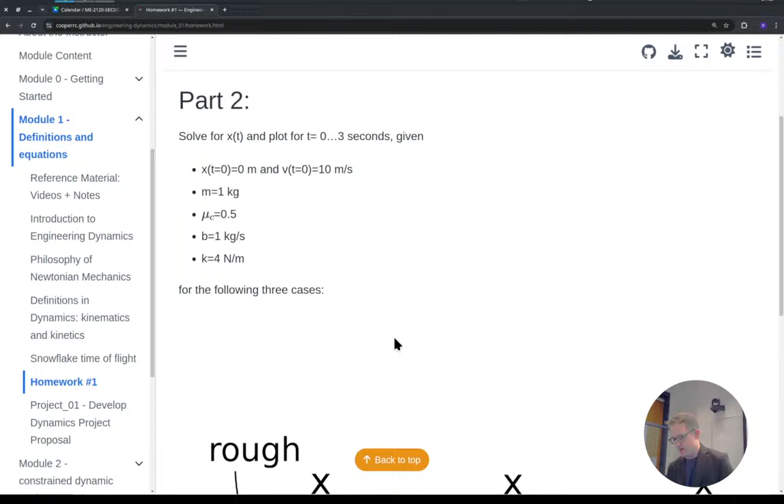Right now we're on to this last part of homework 1. Were there any lingering questions or things from the first few textbook problems that we were working on? Now that you've had some time to really go back home and talk to your roommates of like, hey, you know what we talked about today was the effect of mass on skiers and what their terminal velocities are. And your roommates are like, dude, leave it in school, get out of here.

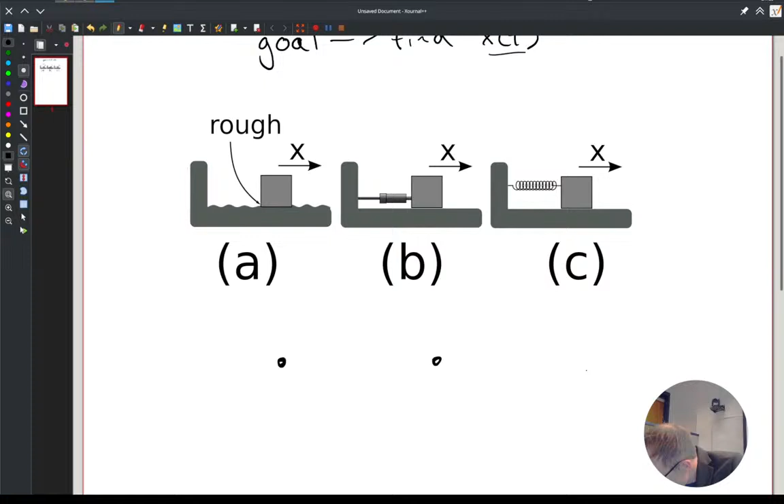All right, so we need 3 free body diagrams because we have 3 different scenarios. What do they look like? Here's A, there's B, there's C. I'm already drawing it as a point mass. If you don't want to draw it as a point mass, that's okay, but I think it's okay to draw it as point mass.

X is like the actual position. So if X is 2, it's 2 meters away from where it started. In this case, we'll have an initial speed, but the free body diagram should be something that is the same whether it's moving or it's standing still.

Viscous damper. Yeah. But you're not the only one. I can guarantee half the class does or doesn't know. What the heck is that? What is this thing?

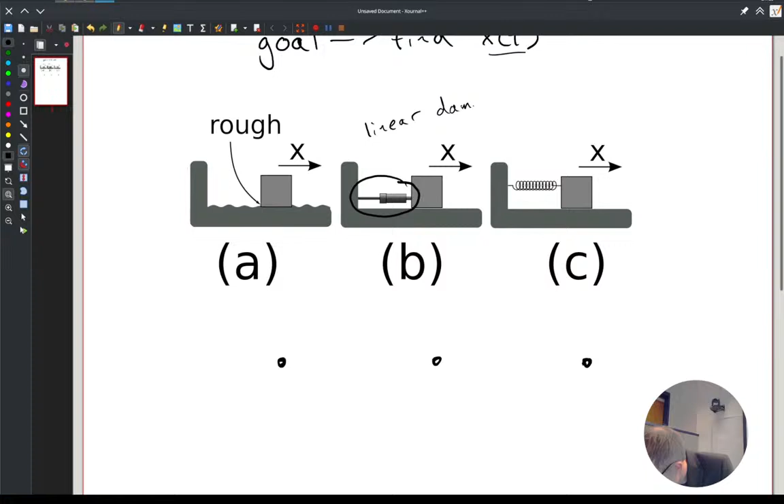So even this door you just walked in this morning has a little torsion spring and a torsion damper. The faster the door moves, the more force it applies to slow it down. This is a linear damper, where the force is some constant times the speed. So the faster you move, the more force it applies. It's a nice way of taking kinetic energy out of the system without storing it up in a spring, it just dissipates it.

The main way we use it as engineers is, I think I don't have it, so let's look it up. Viscous damper. Images. Yeah, something like this.

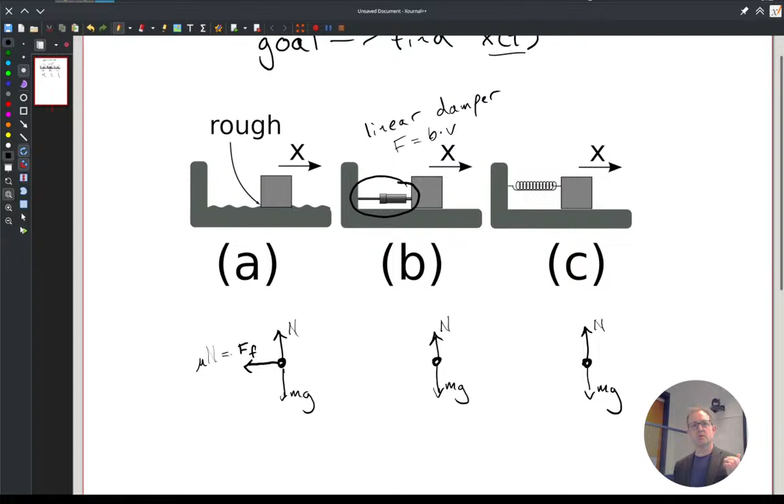Which way is that B times V damper force acting? Against motion. Against motion? Okay, so which way would we point that, to the left? What if it was moving to the left? Would we need a different free body diagram than to the right? What do we think?

So we need two, this one we would have to split up into two different ones, depending on if we're moving forward or backward. But would we need the first one to be split too?

If we're moving backwards, so yeah, I don't know how to pose it as a question, so I'll pose it as a statement. When we're moving backwards, V is a negative number, right? The change in x over time is a negative thing. So instead of saying there's two cases, forward and backward motion, I can think about only the forward motion, so that when it moves backwards, it's still the same force, but it's a negative BV. So it's a negative of a negative, now it's a positive force.

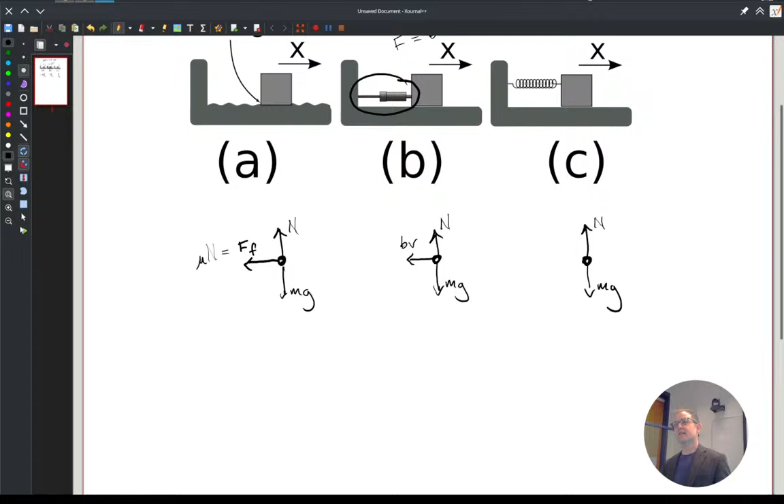Should we draw no spring force? I would draw a spring force because doesn't that X show a displacement of the object? So what the diagram is showing is when X is positive, it's going to move that way, so there is positive X motion in this case. There should be a spring force, to the right.

Sorry, it'll catch up in a second. So pointing that way, spring force? Yeah, this. Yeah, yeah.

So maybe this way. This is the way I like to think about it when I'm building a free body diagram, because sometimes it's not as straightforward - sometimes springs are attached to angles and weird things. I stop and think: if X increases, where is that force pointing? So for a positive X, it's pointing in the negative X direction, that way.

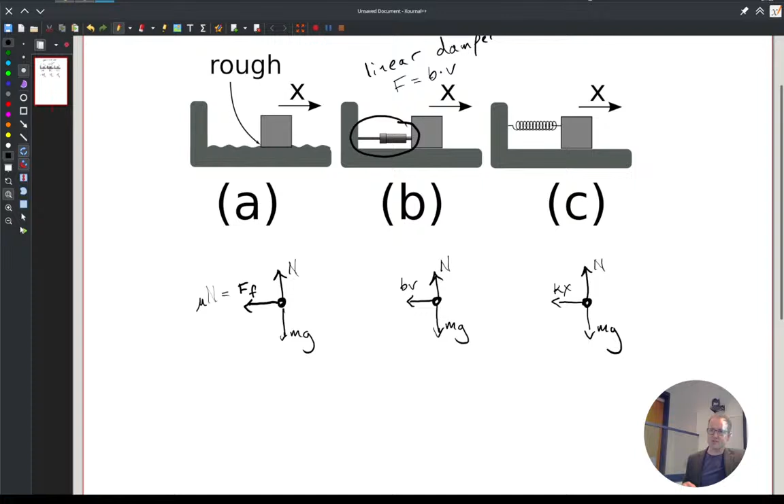It would actually be incredible if it was the opposite - if the further I went, the faster it pushed me, because then you'd have infinite energy. All you'd have to do is give it a slight push, and it'll accelerate to like the speed of light within a few seconds, depending on the spring constant. It'd be nice. So if you do find a spring that pushes you more the further you go, great, use it.

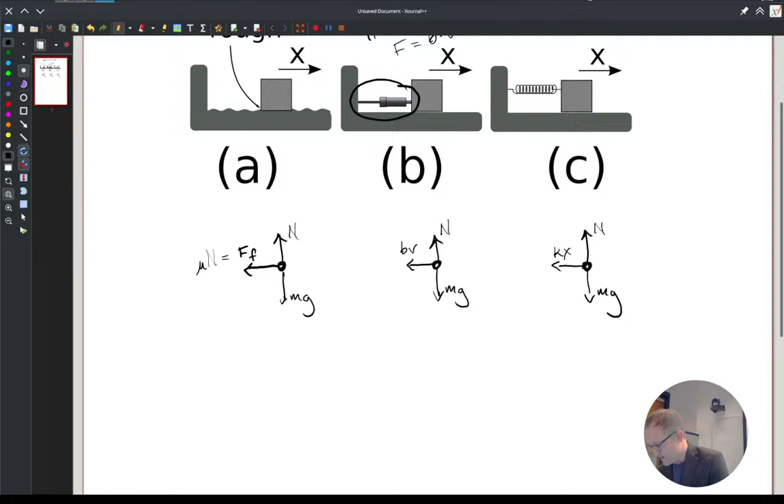But here, what we're seeing is that all three of these are called restoring forces - things that bring you back to zero, like a spring pulling you back to zero. Now you have a lot of kinetic energy, so it sends you through zero. Anyway, all this cool stuff. So all three of these are equal to a kinetic diagram - it's the same kinetic diagram because all three have the same geometry of motion. They're both moving left and right.

So what does the kinetic diagram look like? Sorry, I didn't put your FA on there. Okay.

You can think of it as some force as a function of time - that's a general kind of vibrations analysis. But in this case we know the initial position and initial velocity, which tells us how to integrate the equation. When we integrate twice, we have two constants to solve for, so we don't need to show the force.

Because we're just trying to capture what's happening after time zero, and the FA is applied at time zero. But you can leave it if you want - it's just that it would be zero after that, zero for the rest of time.

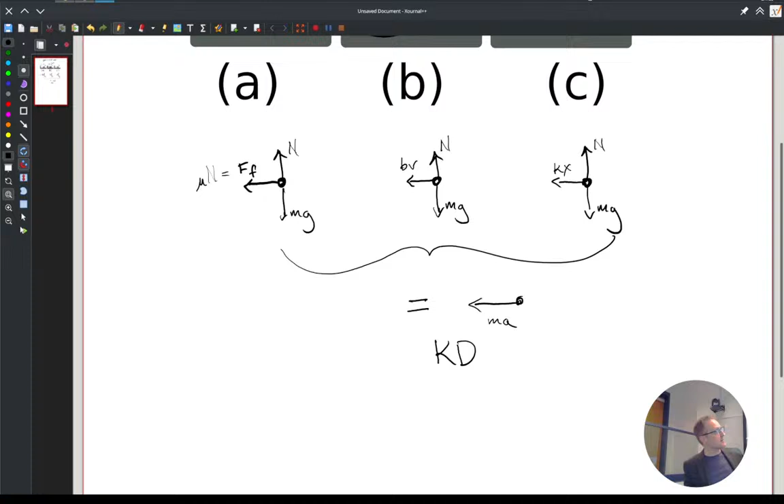So what I've seen so far is a lot of people are already thinking about what the solution is for MA, like MA is pointing to the left. But we were just talking about positive and negative values. The best practice for a kinetic diagram is, if as a group we're saying my x-axis this way is positive, then in my kinetic diagram I want to say A that way is positive A. So we just want to say in the kinetic diagram that MA is describing a positive acceleration. And that might be a little bit weird.

The main weird part is that in statics, a lot of times it didn't matter. If I say the reaction force is up and I get a negative, then it's just the opposite of what I thought, and it's not a big deal. Here, because we have things moving and we're trying to describe motion, we want to make sure our vectors are aligned the way we're describing. So when we say positive MA, we're saying it's going that way, to the right.

Stage left. Wait, stage right? Yeah, stage right, that's the one. It means left.

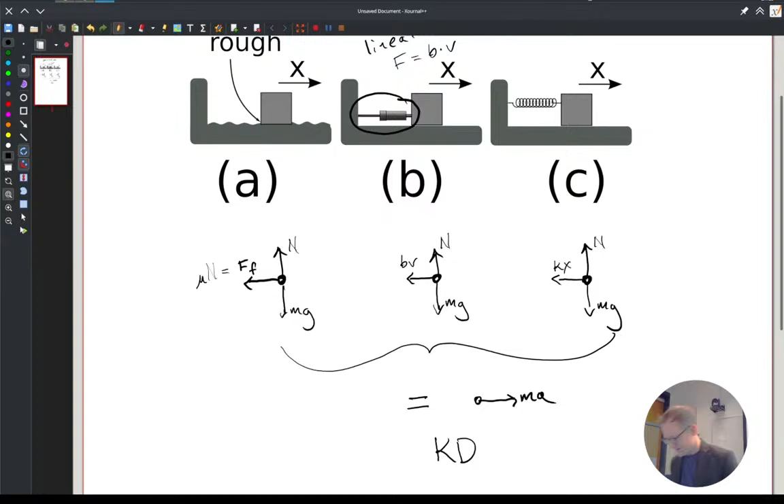But anyway, long explanation, but the nice part about MA in a kinetic diagram is you don't even have to look at your free body diagram. All it's describing is what are your axes, where motion is happening and where acceleration can happen. So in this case, it's only moving left and right, so we only need to draw an arrow to the right.

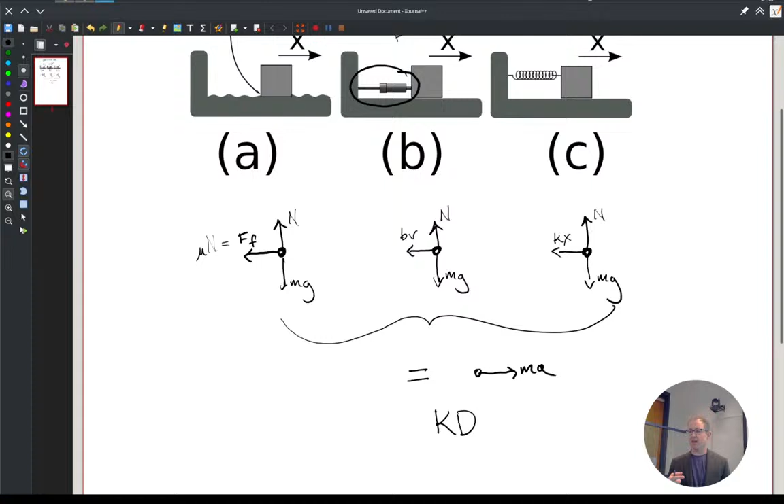Otherwise, we would have a positive MA equals a positive BV, so we end up with that same problem that the faster we move, the more acceleration we get. More velocity, more acceleration.

So now we're going to come up with 3 different values of acceleration. I wrote it out in all 3 forms at the top, like a, d squared x dt squared, and x double dot. They're all saying the same thing, at least in this case, because a is just x double dot, and then just x double dot in the next 2. So what are these parts?

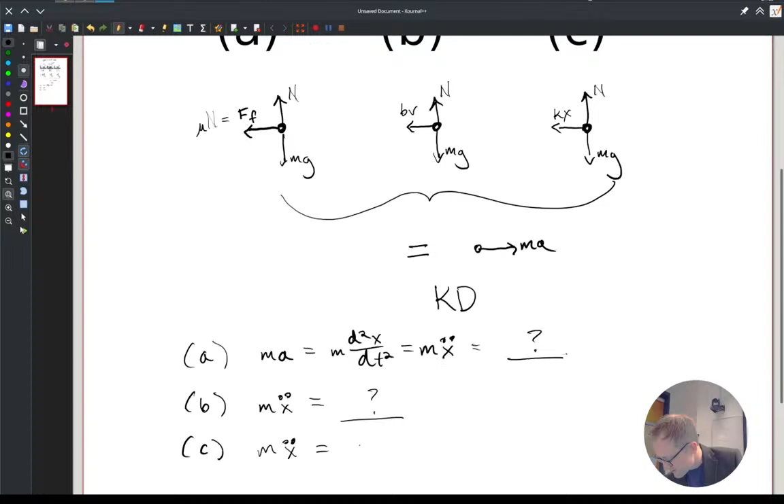Yeah, and that's okay, so we're saying MA equals negative KX. So you're just saying what's going on with the negative? Yeah, okay, that's just like a frame of reference. And that way, my equation that I'm going to solve, the differential equation, is MA equals negative KX, not MA equals KX.

So like when I go back, X starts at 0 and goes, whatever, 3 meters at 3 seconds. That clock started at 0 and then went to 3.

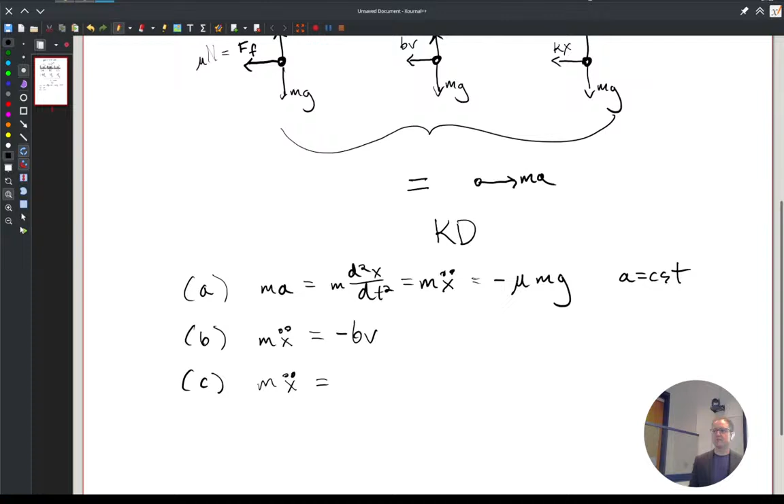Then I saw this one, negative BV, like that—good so far. How about... oh, it's catching up. I feel like it's really slow today. Let's get there.

Negative BV. Is this one changing? Is this a constant acceleration? Can we still use kinematic equations? B is constant. What about V? Is V constant? V is our speed, right—that's how fast we're moving. So acceleration is a function of speed, but speed is a function of time. So here, A is not constant.

Yeah, so it's decelerating in this case. I think for the most part, dampers are always going to take away speed. I don't think there's any case where a damper would speed things up. I'm pretty sure for the most part it's always reducing, getting rid of, because you're taking your kinetic energy and converting it into fluid motion, and the fluid motion just dissipates as heat and stuff that can't be used. So A is not constant anymore.

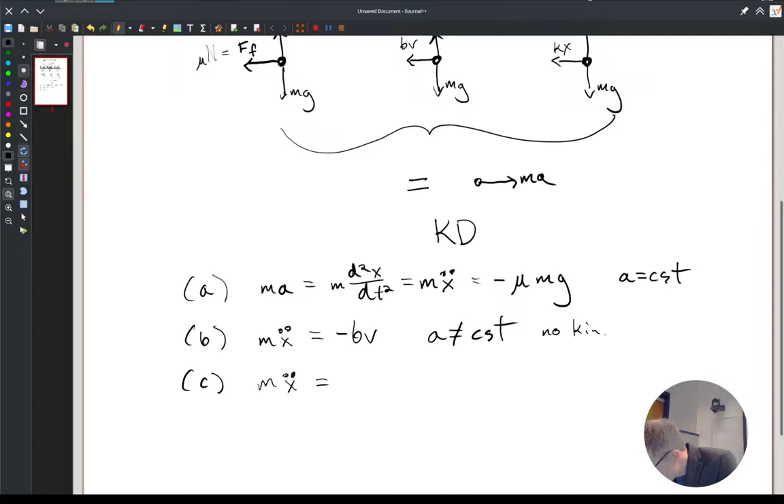So we've got to solve for our own kinematic equations there, because kinematic equations are really just a differential equation that's solved for a specific case where a equals a constant.

Last one—any issues here with negative kx? That's what I saw so far. Looking good.

And so, kind of walking around, people with MA pointing the other way—really what we're trying to get to are these differential equations when we have a free body diagram and kinetic diagram for dynamics. If things are moving, then you want differential equations. Whether or not you want differential equations in your life is a different question, but at least in this case, it's good that you ended up with a second order differential equation. That means things are going well because you've identified variables that are a function of time and time derivatives. We're good, we're on the right track.

So I think for A, we can come back to A, but we know kind of how. So let's go into part B first.

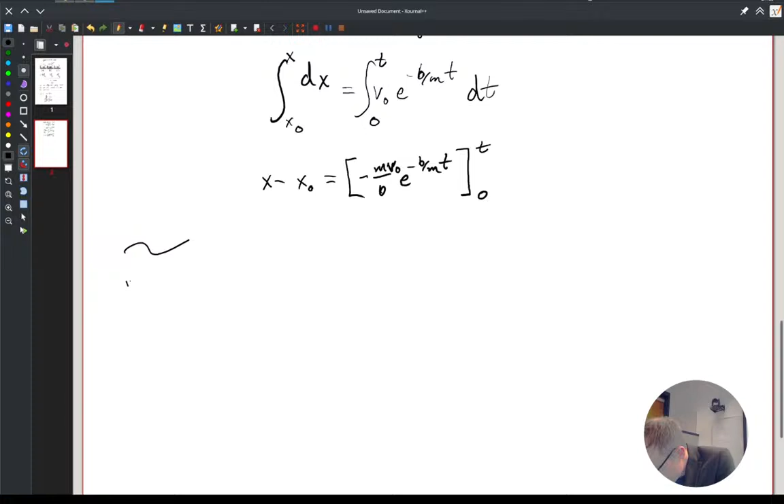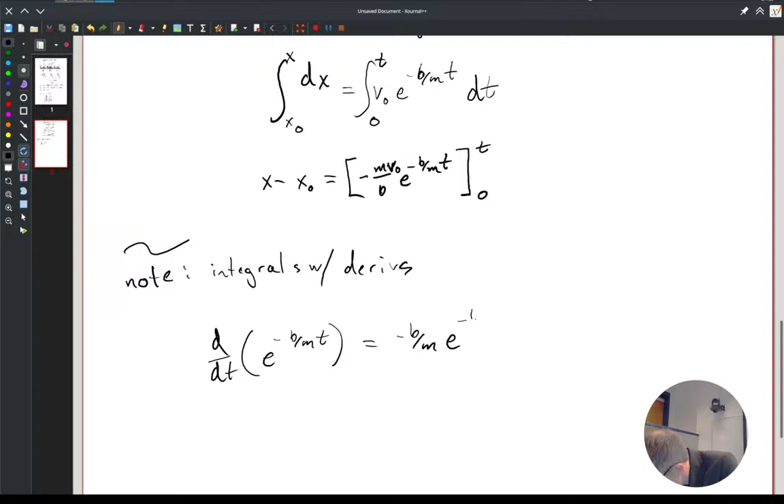So the Richard Feynman approach is never take an integral, just always do derivatives and try to guess what derivative you need to solve the integral. So in this case, I know d/dt of e to the negative b over m times t is negative b over m times e to the negative b over m t. That one I remember all the time because it's easier for me to remember, but it's harder to remember that the integral is 1 over that constant.

So I can solve for the integral, doing the same thing we just did. To do that I just put a negative b over m over here, or sorry, I multiply by m over b. Kind of nice. So now the integral of e to the negative b over m dt, which is what I was trying to find, is m over b, the negative m over b times that. Kind of a nice way of doing integrals without having to remember what the integral is.

Okay, so we have negative m v0 over b, e to the negative b over m times t. Is that it? Yeah. Wait, why is it negative m over b instead of negative b over m?